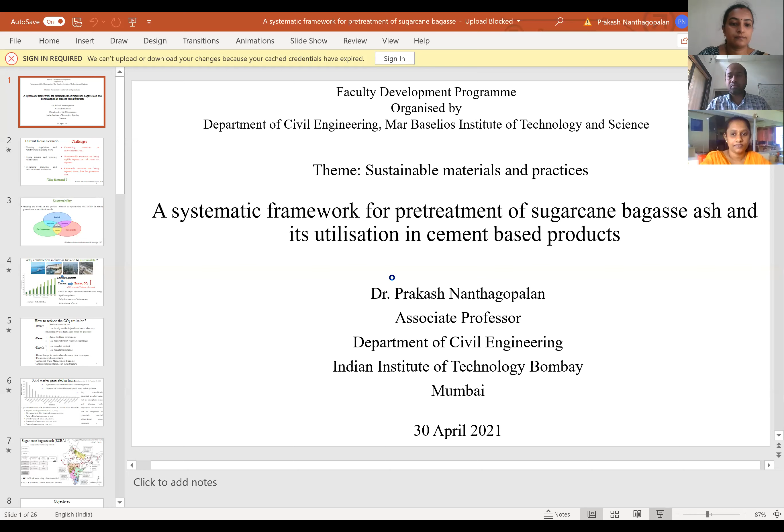Is my voice loud and clear to the participants? Voice is clear, sir. Okay, let me share the screen and check whether the presentation is also clear. Is my screen visible now? Yes, sir, it is visible. Is it in full screen mode? Yes, now it is in full screen mode. Just 1 minute, let me connect and disconnect one more time because I am using two screens, to make sure there is no confusion, because sometimes I used to write on the screen. So don't get panic if I get disconnected in the next 2 minutes. Okay sir, no problem. Just want to make sure that things are clear. If you give me a couple of minutes, I'll be joining.

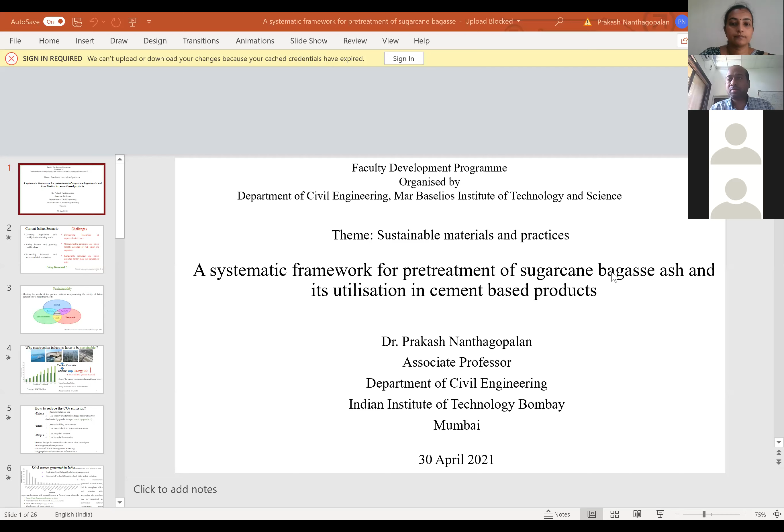Thank you. Thanks for the introduction, and thanks for the opportunity given to deliver a lecture for this faculty development program. I will share the screen and then we can start the presentation. Is it visible? Yes sir, it is visible. Okay, good.

Thanks a lot again, let me start this presentation. This is basically work done by my research team on utilization of bagasse ash, sugarcane bagasse ash, and its valorization or utilization in cement-based products. Since this particular FDP is basically on sustainable materials and practices, I thought I should talk a little on sustainability, and how this particular work is related to sustainability, and how to make sure that sustainability from the material perspective is ensured. So these are the things we will be covering at this point of time.

We'll move on to the presentation. Before going into the discussion of sustainability, let us try to understand what is the current Indian scenario. Whenever we want to do any work, it's possible that sometimes we may do some work, but it may not create a conducive environment. So first let's try to understand the background. As far as India is concerned, we are having a lot of unprecedented growth in population.

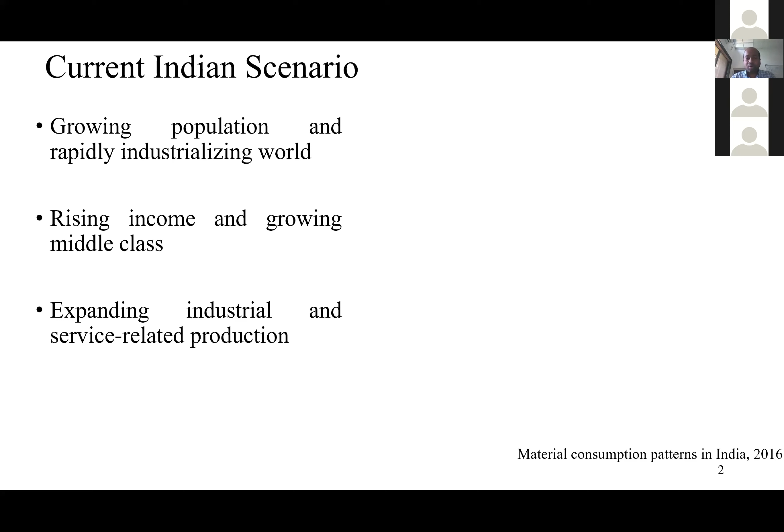So what does this lead to? This leads to expanded industrial influence, because every product that we use is going to have some impact on the earth. As far as the earth is concerned, we know that without these industries, it's very difficult to process. Not only industries, but service-related production as well. So this is the current scenario.

So what are the challenges in front of us? As far as the challenges are concerned, we are consuming resources at an unprecedented rate, and at a very rapid rate.

If you look at the amount of minerals that we extract, just to give an example, as far as the Indian condition is concerned, we are extracting almost 1,600 tons of minerals per square kilometer, whereas the world average is only 450 to 500 tons per square kilometer, which means we are almost 4 times higher than the world average in terms of mineral extraction. Minerals meaning the things being used from the earth for making products. So if that is the case, this is a little alarming situation.

Some of you might know that most people are migrating towards urban areas or cities. Because of this, products that are made have to be transported to facilitate the population. For example, if people are distributed across India, then whatever is produced locally would be available to them. But if you look at the statistics, by 2030, almost 40% of India's population is going to be migrating towards the cities because of job opportunities and other better life aspects.

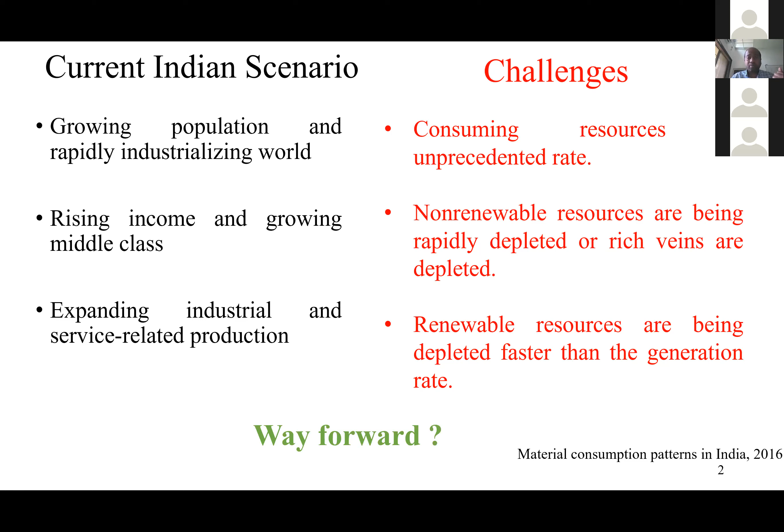Now, the only way forward is to have a sustainable environment. I believe all of you attending this lecture have heard this word for the last 30-40 years, almost 3 to 4 decades, people have been talking about sustainability. There is definitely a very prescribed definition for sustainability, but I'm not going to talk about that. In my opinion, what is sustainable?

Is the earth sustainable? Of course, earth is ideally sustainable. If you look at the living beings on earth, definitely these things are sustainable. How? Take any process, let's say agriculture - right from sowing the seed till it becomes a fruit, vegetable, or useful food product, the residue goes back to the earth and becomes manure, and then it comes back again. So the cycle is very clearly established. Take any process - ideally those things are sustainable.

Then why are we discussing sustainability on earth when every process has a sustainable approach? Please understand that this is because of our lack of understanding and the limitation of science. You might ask, why limitation of science? We are growing every day, we have sent rockets to the Moon, to Mars. How come you are saying limitation of science?

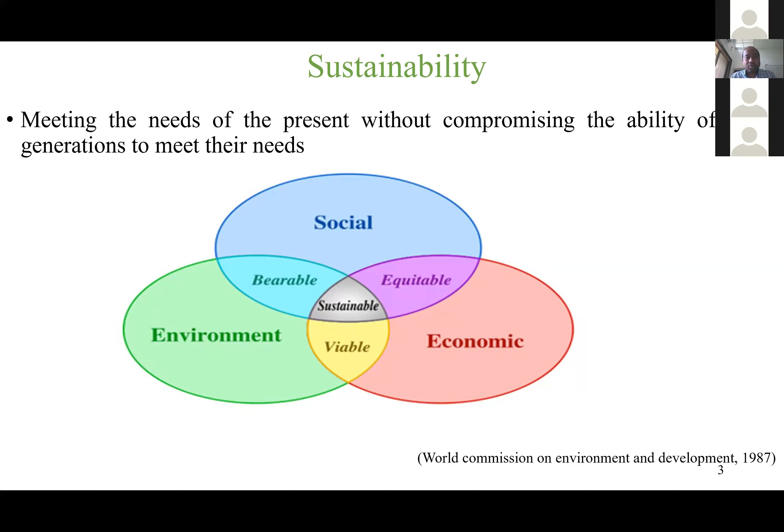Definitely you might have heard about all other sustainability aspects in the last 3-4 days or 3-4 decades. So we do have a sustainable material perspective. First of all, thought process or mind, body, and then we have to move towards the materials that we see. Since this has been discussed over the last 3 days, I'm skipping this particular definition. We will move on to why the construction industries have to be sustainable, because we are relevant to the construction industry.

Why? Because for a country's growth, infrastructure is very, very important. As far as infrastructure is concerned, definitely you need cement concrete. For cement concrete, we need cement. You might know that the cement content in concrete will roughly be in the range of 10 to 15% only. However, the amount of energy consumed and the amount of CO2 liberated is enormously high. Looking at the trend in the left-hand side picture, by 2020 we are closer to 500 million tons of requirement.

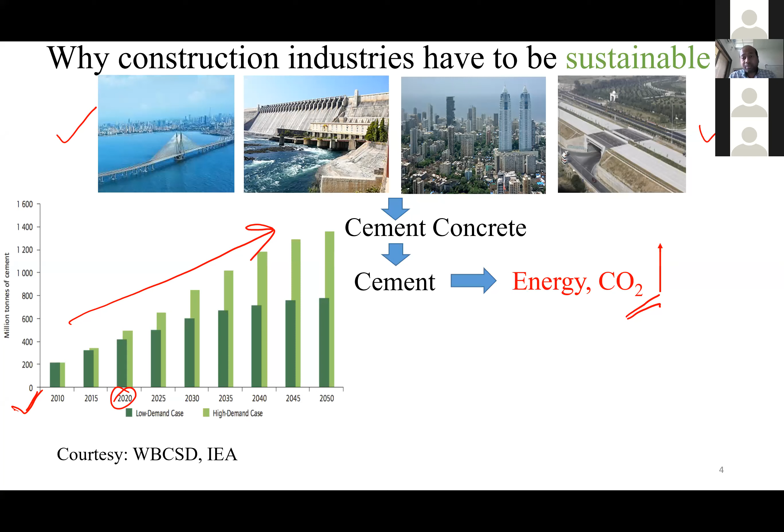If you look at the installed capacity of cement production in India, we are closer to 500 million metric tons at this point of time, which means India has the capability to produce 500 million tons of cement per year. However, the production is a little less because that depends on the infrastructure requirement. So we need to understand that this is going to have an incremental trend because of the requirement from society. We can't say that we will not produce cement because it is creating a lot of CO2. We have to produce cement. We have to have alternative means because this infrastructural development can never be stopped. Then it will affect the growth of the country.

So a lot of emissions are getting generated because of the production of cement. It is polluting the environment. Not only that, whenever we use cement or concrete for infrastructure, because of lack of quality, we are losing the life of the infrastructure. Instead of lasting 100 years, the building is showing a lot of distress in 20 years itself. Hopefully many of you might have seen that.

So what happens? A building which is supposed to stand for 100 years is deteriorating in 20 years. You do some kind of repair, it goes up to 30 years. By the end of 30 years, you have to demolish and construct a new one. So you have to do this 3 times. So look at the amount of material, energy, time, and money getting wasted because of improper workmanship, improper material quality, substandard designs, and so on.

So sustainability cannot be addressed just by materials, by practice; it needs collective effort from all segments of construction, or the stakeholders of the construction.

During the process of making and maintenance, a lot of wastes are getting generated. Generally, in my dictionary, there is no such thing as waste. We can say at this point of time, I do not know how to use that material, because the so-called waste like fly ash, which was considered as waste, now is a potential material. We are giving money to purchase that. So we should not say it is a waste; it's a residue which doesn't have any process at this point of time to consume. We will put it that way.

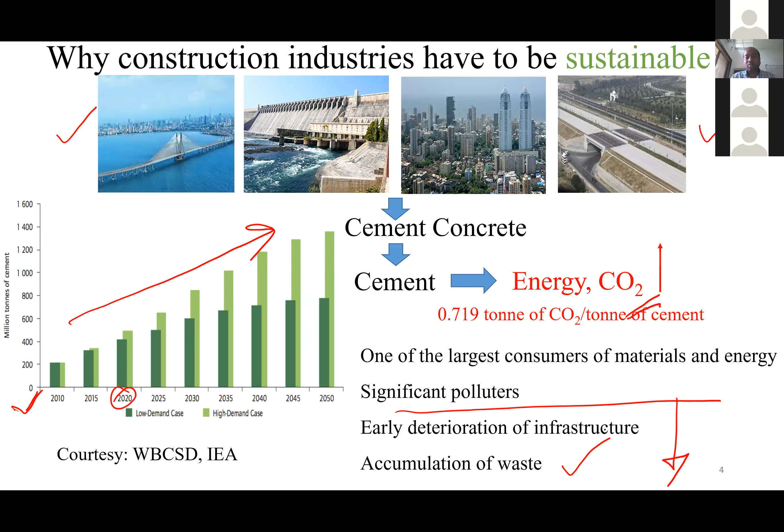So what is the issue with these kinds of production of cement? A lot of CO2 gets generated, and you know what is the problem with CO2: creating problems with the atmosphere, global warming, and so on. These things you know very well. So to reduce global warming, which is affecting the climate, we need to reduce CO2 emission. How to reduce? There are different means. Reduce the material usage; we can consume a little less.

Then using locally available material. What is locally available material? For example, whatever is available in a particular state, we have to try to use it for the construction, which means that the logistics involved in bringing materials from outside can be minimized. Then the second aspect is reuse. We can reuse the building components, and we can also use materials from renewable resources.

Say, for example, bamboo. Bamboo construction is happening in many parts of the country. So if bamboo is there in the local area, let us say Assam, possibly there they can promote more of this renewable resource material usage for construction. Of course, it is not that you should, but you can consider this as a potential aspect for reusing.

Then recycling. Since we started our constructions from 1960 onwards, not 1980, most of the buildings are getting renovated and are reaching a kind of end of life. So these kinds of things generate a lot of demolished waste. So can we reuse that?

Yes, we can reuse that, but please make a note: the building demolition waste which you plan to use in construction, have caution that the building has already been exposed to contaminants. You should consider that and accordingly design the new building, because many times it's not just taking the concrete, crushing it and using it directly. Salts will be there if it is closer to the sea, so salt contamination may be there in the mortar which you are crushing and planning to use in the new construction. So you have to do meticulous research, proper estimation, proper understanding, then only use it.

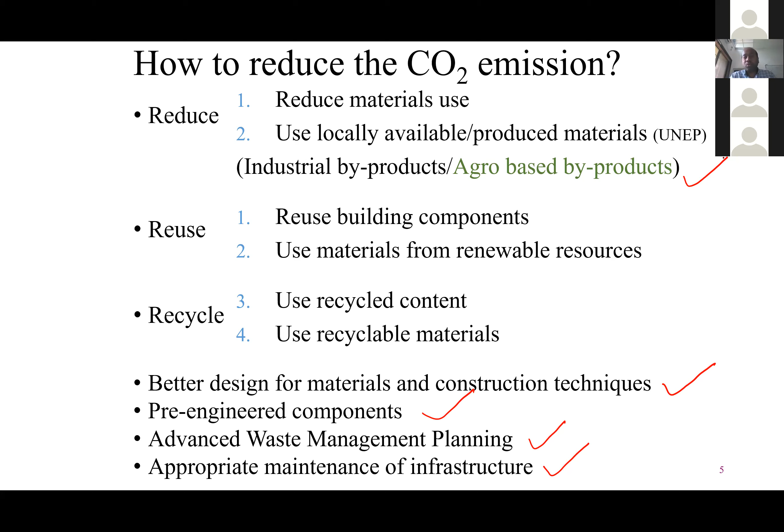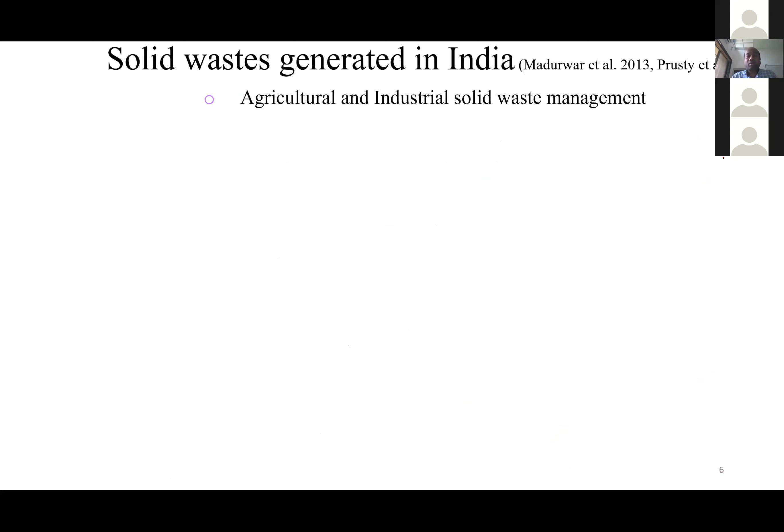So today, looking at the agro-based wastes, let us try to see some numbers in terms of these wastes and why it is a problem. Because agriculture industrial solid waste management is becoming a point of concern. Why? Because these things are polluting the land, water, and air. Why are these polluting? Because of the quantity.

If you look at this agro-based waste, especially bagasse, rice husk, jute fiber, rice straw, groundnut shell, all these things are actually dominating the agricultural residues. Residues means at this point of time, we are not able to utilize its potential, either in the raw form or a processed form.

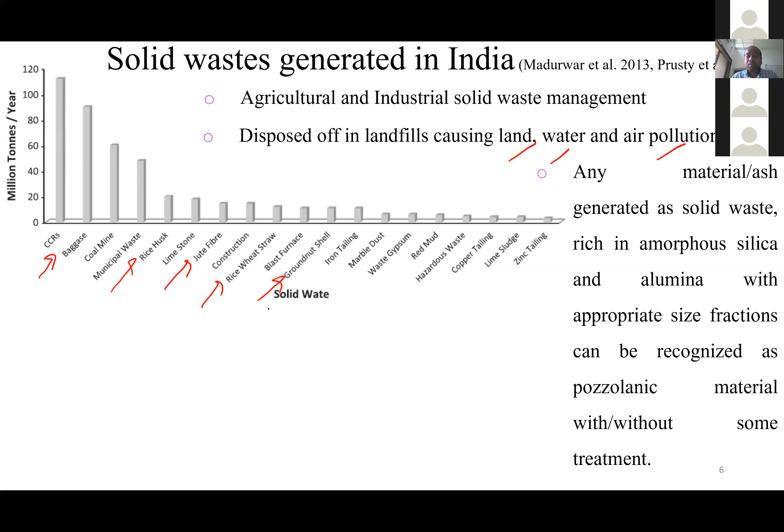So let us look at what other things have a potential to be used in cementitious materials, and what conditions we need to look for in those particular materials. Say, for example, the agro-based residues available in our country or any other country for that matter, if it has a potential to be used in cementitious materials, then it can be used. How do we assess the potential?

In any material and ash, if we are looking at the silica in terms of amorphousness, basically amorphous silica and alumina, and with appropriate size fractions, definitely this becomes a potential pozzolanic material for use in concrete. This is not something new. Everyone knew about it. So whenever you are planning on using any material, please try to look at whether silica and alumina are there, especially for use in a cement-based system, and then check whether it is amorphous or not.

Because many times you may have silica, but it will be in crystalline form. Then it becomes non-reactive and it will be acting as a filler. So it's very important to know in what form these are there. By using XRD, it's possible to find whether it is amorphous or crystalline. In fact, you can quantify it as well.

So once you know this particular aspect, then you can check the list of materials which have similar materials in amorphous form, like sugarcane bagasse ash, rice straw, rice husk ash, palm oil fuel ash, bamboo leaf ash, and so on. These things have been done already. So from this list, we will be discussing sugarcane bagasse ash in this presentation. Why sugarcane bagasse ash?

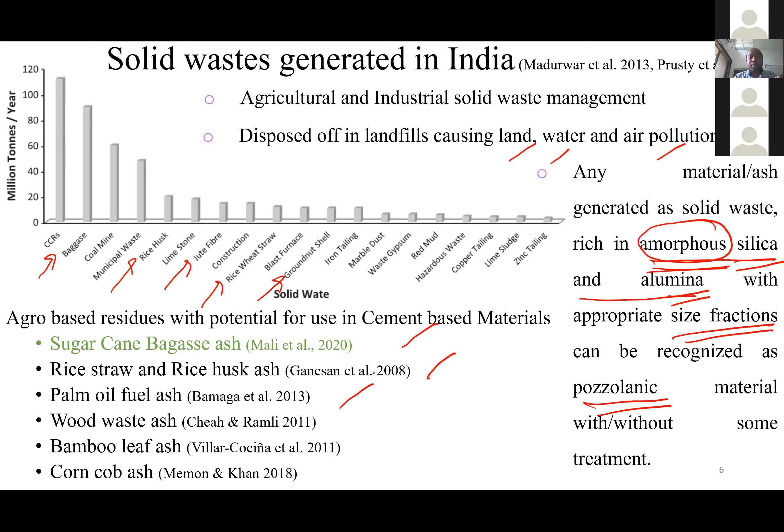Okay, why is this essential? Because even in Kerala, I think the thermal power plants are also few. I believe only 3 thermal power plants are there: Kayamkulam, Brahmapuram, and one more. Only 3 plants, which means the amount of fly ash available will also be less. So we need to look at the locally available materials and then try to make a decision.

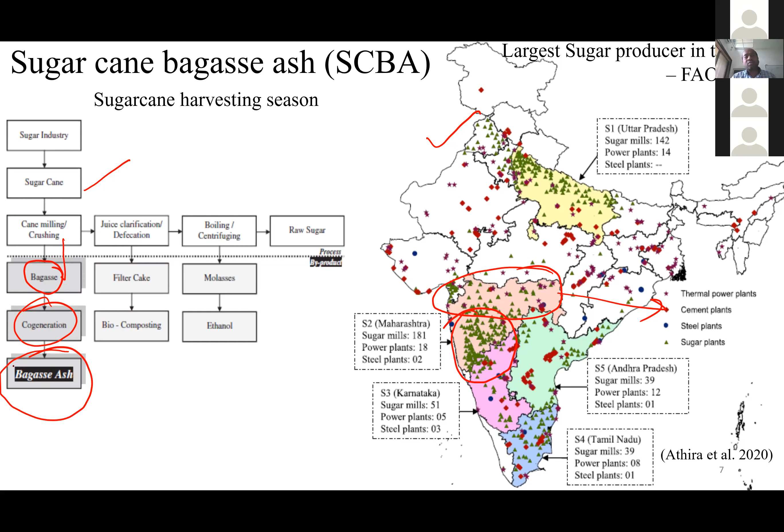After the cogeneration plant, the bagasse which gets converted into ash is called bagasse ash. This is what is referred to as sugarcane bagasse ash. As far as this material is concerned, we are producing more than 44,000 metric tons per day of bagasse ash. But this is old data, published in 2015. So possibly by this time we might have reached almost 50,000 or more metric tons per day.

Looking at the amount of bagasse produced in the country, it is always desirable to see whether this has the potential to be used in some form in society. That's why the first availability study is done. It clearly shows that almost 50,000 tons of material all over India is being produced, which means this has the potential to be used.

But does this have the potential to react with cementitious materials? That we have to check. So we did some analysis, and based on the analysis, it was found that this has carbon, silica, and alumina. And the silica and alumina are also amorphous in nature.

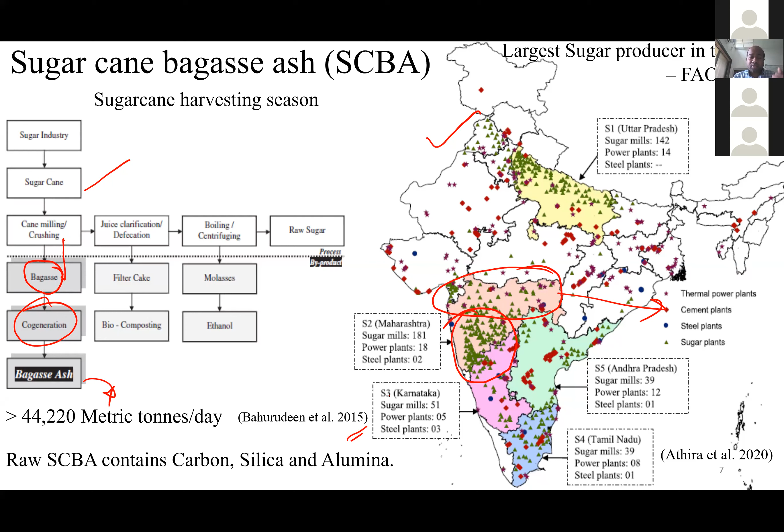So please recall the discussion that we had early in the presentation that any material which you plan to use for cement-based replacement definitely should have amorphous silica and alumina. Since this has silica and alumina and it is amorphous in nature, this is basically a potential material for using in cement-based systems.

Okay, so based on that, the objective is framed mainly to transform SCBA into a suitable pozzolanic material for using in cement-based systems. Second, to optimize the SCBA dosage through a conceptual approach for using in cement-based products. So first thing is the as-received bagasse ash, whether it has a kind of potential to be reactive; although the composition says so, we have to evaluate it through certain test methods. Second, once we find that this is pozzolanic in nature, how much percentage we have to replace and how to optimize the percentages.

Can this be done through a conceptual approach? Yes, it is possible. Why do we need to go for a conceptual approach? Because these things help us to maximize the potential of the material used and maximize the sustainability aspect of this particular material as well.

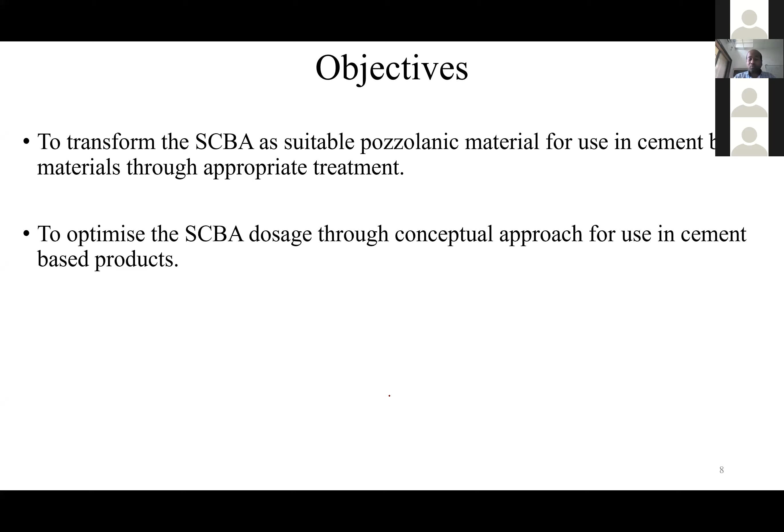So we have collected this sugarcane bagasse ash, SCBA, from a sugar mill in Maharashtra, and the temperature that this particular bagasse has encountered is almost 750 degrees Celsius. Generally, for these ashes to be more amorphous, it should be in the range of 600 to 700. Since this is a high temperature furnace, it has gone up to 750 degrees Celsius.

Okay, and then we have done chemical composition analysis, and if you find, this silica content is enormously higher, that is more important. At the same time, there is an ASTM classification, ASTM C618, which clearly defines that any material which you wish to use as a pozzolanic material should have more than 70% in terms of silica, alumina, and iron oxides. Since this is 92.59% and it is amorphous in nature, we can definitely and confidently use this material for replacement of cement. And of course, the collection system is also very important, where you are collecting.

When you look at the microscopic images of these particular sugarcane bagasse ashes, different forms are available. Fibrous materials are there, porous materials are there, tubular materials are there. Then some spherical materials are also there with a lot of porosity. And these particles are hygroscopic. What is hygroscopic? Hygroscopic means a material which has a tendency to attract moisture and at the same time hold the moisture. So this particular bagasse ash has that potential to attract moisture and hold it, which means the porosity in this system is higher. Okay, right. So this is how we have to characterize.

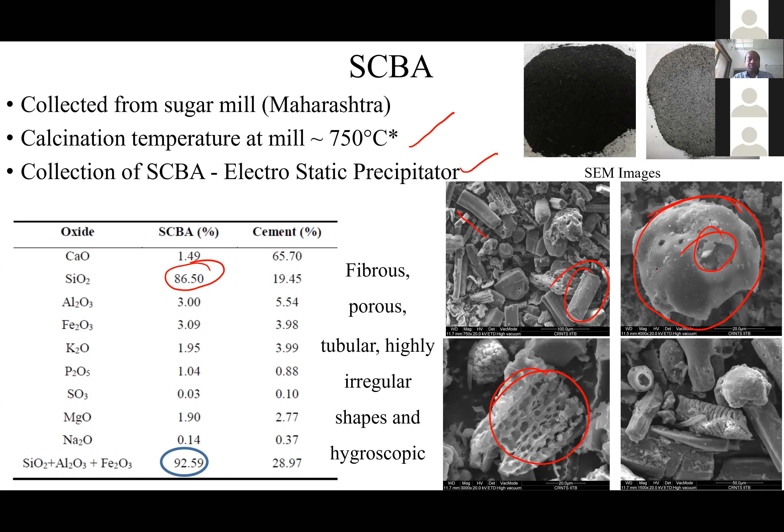When you look at the particle size distribution, the sugarcane bagasse ash that was obtained is almost 25 micron in average size, and cement is almost 20 micron; D50 is 20 microns. So looking at this, these particular materials are relatively coarser than cement, which is not desirable in terms of packing effect. So we have to grind it so that the particles become finer. Once it becomes finer, it contributes both physically and chemically. At this point of time, it can contribute chemically because of the presence of silica and alumina. But now, if the sizes are reduced, it can fill into the pores of cement, and that gives a kind of physical effect as well.

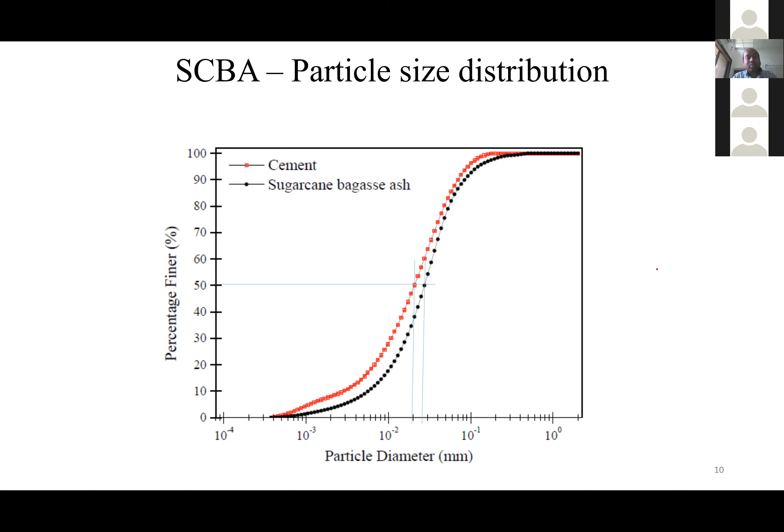So we have to look at the other aspect also, LOI. Many of you might know about this LOI, loss on ignition. This is nothing but loss of mass, quantified or expressed in terms of loss on ignition. As far as ASTM is concerned, any material that seems potential for use as a pozzolanic material needs to have less than 10% LOI, which is basically contributed by carbon particles. The ash received from the industry is around 13% LOI. So as per the definition, it doesn't really pass the pozzolanic criteria.

So what we have done is we have tried to incinerate the materials at different temperatures, 800, 900, 1000, 1100, to see whether we could reduce the carbon fractions. Based on the study, it is very evident that the carbon percentage, LOI, decreases with increase in temperature. But the problem is, once we start to increase the temperature, crystallinity kicks in. Tridymite and cristobalite, these are also SiO2. These are crystalline materials, which means they will not possess reactive potential.

As I mentioned earlier, we need amorphous silica to dissolve into the solution and react with calcium hydroxide to form products. But in this case, since these are crystalline silica, they will not have reactive potential in cement-based systems. So we concluded that although the LOI decreases, it is very difficult to get the reactivity. We are losing the reactivity.

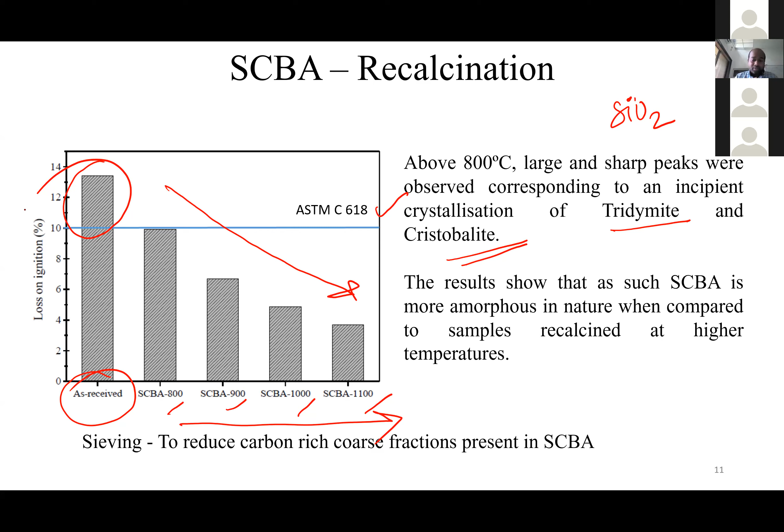We'll move on to the next slide. First we tried to see if some treatment is essential to reduce the LOI. By simple sieving, we could bring down the LOI. That's fine.

We have reduced the LOI, but whether the particle size, which is basically higher than the mean size of cement, is going to be a hindrance, that has to be addressed. How do we address it? By reducing the particle size. How do we reduce the size of the particle? By using comminution or particle size reduction. So we used a ball mill.

This ball mill has a capacity of 100 liters. We used it at a speed of 20 RPM, and we used different steel ball sizes.

Now I wish to give you a couple of pieces of information. Those who use ball mills are many times very casual about selecting the charge-to-materials ratio and the volume of the charge and materials relative to the volume of the container. We always have to be very meticulous in selecting the charge-to-materials ratio. What is charge? Please understand, charge means the steel balls are referred to as charges, and materials are referred to as SCBA. Generally this should be in the ratio of 4:1 or 5:1.

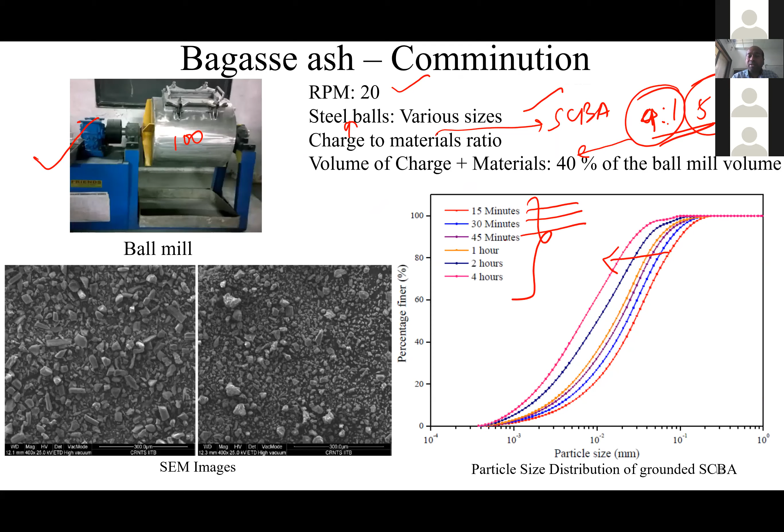To understand the optimum grinding time, we measured the specific surface area for each time interval—15 minutes, 30 minutes, 45 minutes. We take the sample and do the surface area test. When we plot these, it's evident that up to 120 minutes there is a clear increment in the surface area. Beyond that, it becomes almost saturated. So based on this information, we can understand that for this particular bagasse and this particular ball mill, the optimum grinding time is 120 minutes, because beyond this there isn't much enhancement in the surface area.

Why are we looking at this from the energy perspective? Because if we grind beyond 120 minutes, the benefit we get from grinding is less than the energy we consume. Since we are already talking about sustainability, unnecessarily spending energy makes this process unsustainable. That is why we do this optimization in a systematic, simple, step-by-step procedure.

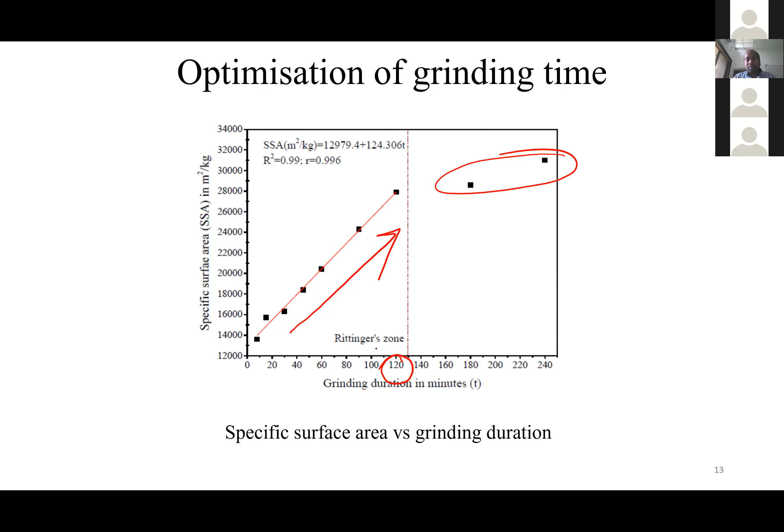So first we received the material and did the analysis for chemical composition, checking whether it is amorphous silica or not, then moved to thermal treatment. In the thermal treatment, it was evident that it doesn't give amorphousness, rather it gives a crystalline structure, so we are not giving thermal treatment. Next we move on to grinding, where we optimized how much the grinding time should be. Now the material is ready, so the first objective is complete.

The second objective is to optimize the dosage—how do we optimize the proportions for the processed SCBA?

This aspect of optimization can be done using the principle of particle packing. Many of you might know this. Particle packing is one of the vital aspects of concrete mixture proportioning. This word isn't used in the Indian standards or any standard, but the implicit scientific concept behind every mixture proportioning standard is particle packing. How we select materials and their proportions, especially aggregates, has an underlying concept of particle packing. In the standards we use the word 'gradation,' but its implicit scientific meaning is dictated by particle packing.

What is particle packing? It's a concept by which we select the right sizes and proportions of materials for maximum packing density or least void content. The packing density is expressed as a unit. Please understand, particle packing is a concept, and packing density is the unit by which particle packing is expressed.

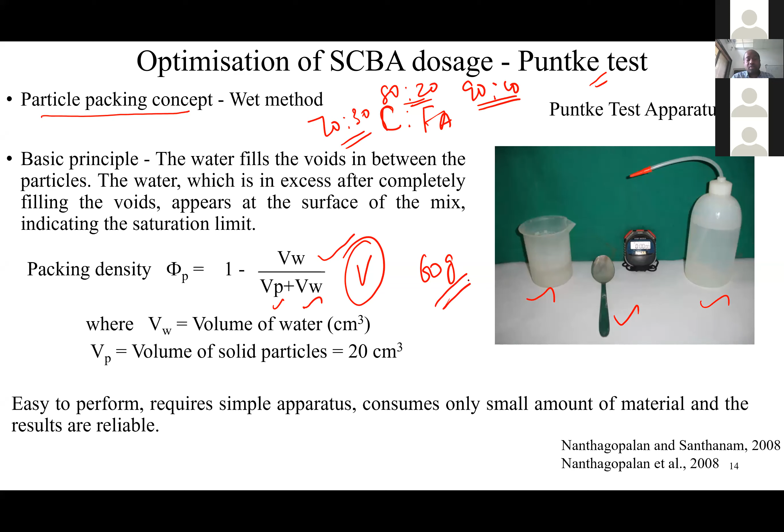Now why is it increasing initially and then decreasing? Initially, since these particles are ground fine, they fill the space between the cement particles, and maximum packing density is achieved for this system. Beyond 15%, although the particles are finer, their dominance tries to create some disturbance to the packed system. So each cement particle will have a kind of arrangement, let us say.

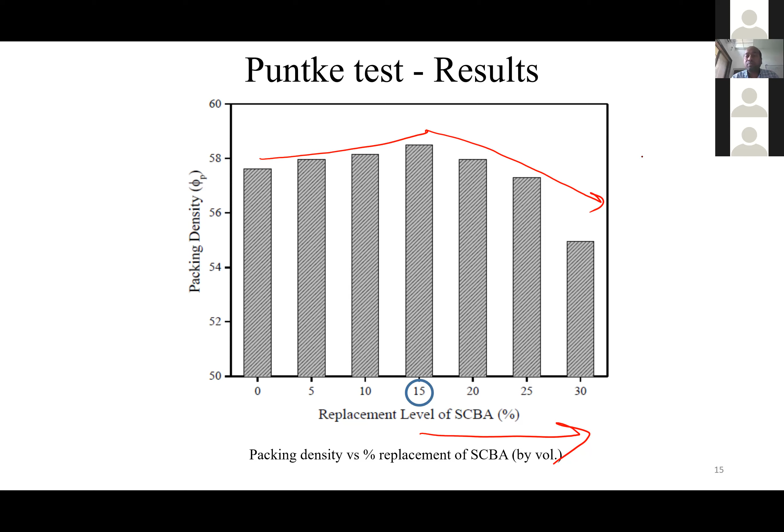There is a container like this, and the particles are here, and these sugarcane bagasse ash particles are filling in here. Now if the percentage of SCBA is increasing, this cement particle may be disturbed by another particle coming in between, like this. So what happens is the void content is invariably increasing, and that gets reflected as a loosening effect. We call that the loosening effect, and because of it, we get a decrement in the packing density.

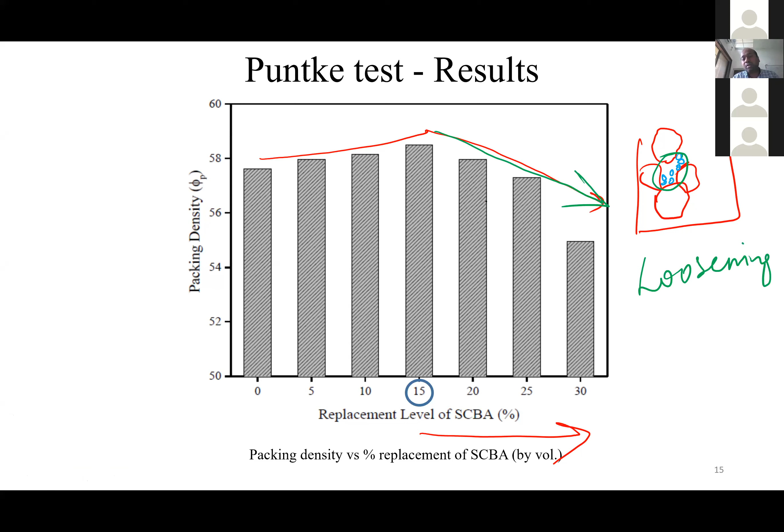Next, since I mentioned we are optimizing the dosage based on a conceptual approach, earlier we discussed particle packing as a concept. In this case, we will be discussing rheology. What is rheology? It's simply the science which helps us understand flow.

The word may look familiar to many of you, or maybe new to some. Rheology is something known to us already; the only difference is we are not aware we are understanding rheology knowingly. For example, every morning we take toothpaste, and when we squeeze the paste out, we are invariably using the principle of rheology, but not knowingly. So when you press, it comes out. When you lift your thumb, the paste stops.

So what is the meaning of that? That particular paste needs some kind of stress, and when the stress is applied, it reaches a point called yield stress, beyond which it tries to move out. Once you release the stress by lifting the thumb, the stress applied is stopped, so the paste, which is supposed to deform, stops there. Every material is designed in a very different way.

For example, coconut oil is different—for that, you just tilt it, and it will come out. Cream, tomato sauce, everything invariably has a rheology.

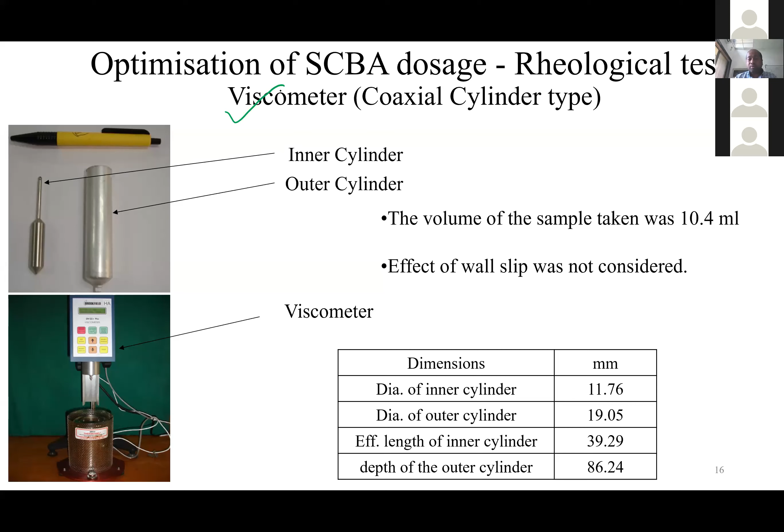In the viscometer, what we actually do is give a shear profile, which means we are allowing the material to shear in the fashion we wish. For example, in this case, we are giving a pre-shearing. Pre-shearing means you are making the material shear.

Is my camera on? Can somebody please respond? Yes, sir, it's on.

So, for example, let us say this is the container. We are trying to make sure that this system is mixed properly. This is called the shearing process. Initially, whenever we do some kind of testing, we do some pre-shearing. I'm not sure how many of you have heard this word pre-shearing. It's basically like erasing the memory. Why do we need to erase the memory?

For example, almost 50 people are attending this lecture. If you had some issues before this lecture and carry on with the same thought process, you will not be able to grasp the complete potential of this lecture. You might have taken a deep breath and said, okay, clear, let me listen to the presentation. You are erasing your thoughts. That is called pre-shearing.

We do the same thing in material also, because when we mix in the mixer machine, we are taking, pouring, involving the material in different processes. Those processes should not influence the property of the material. For that, we erase the memory of the material. You might wonder whether non-living things have memory. Of course, yes. Everything has memory.

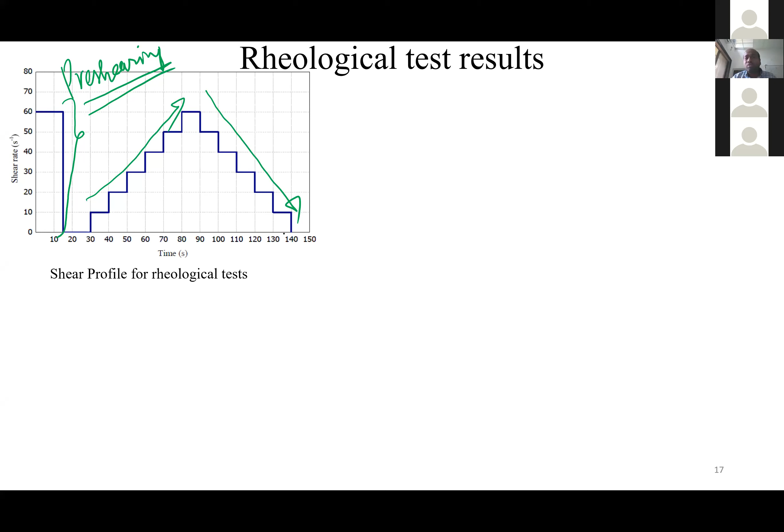Second, you move the hand the same way as in water, in curd or say honey, you will feel a different resistance, right? Why? Because for the same speed, you are getting a different experience from different materials, because the response is different from each material because of the integrity of the material. These kinds of systems can be understood for cement-based systems also, because these things are very important for making the material mix, place, vibrate, pump. For all these processes, this becomes a base.

So to understand it in a very simple and more stable manner, instead of taking the ramp up data, where the machine will also struggle to get the response, in the ramp down data you will get stable data. That is why it is always preferable to get the ramp down. This is called ramp up, ramp down. The ramp down data is taken and plotted between shear stress and shear rate. The minimum stress required to deform is referred as yield stress.

For example, in the morning, when you press the toothpaste, initially it will not come, but you have to squeeze it more. Beyond a certain squeeze, it comes out, which means that is the amount of stress required to deform the material. That is called yield stress.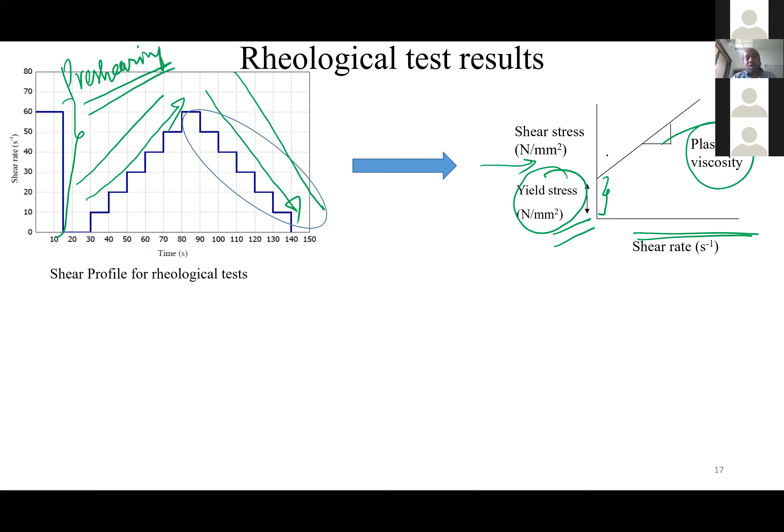Now, what is plastic viscosity? Once it is moving out, the slope of that is referred as plastic viscosity. If you plot the data, based on the slope you can get plastic viscosity. What is the physical meaning of plastic viscosity? It is the flow resistance after it has yielded. After the particular material has yielded, how much resistance the material is offering for flow. That is what is defined as viscosity.

So using this particular graph, with replacement level, if you make a plot of yield stress and plastic viscosity, it's very obvious that beyond 15% replacement, the stresses are increasing tremendously. Why? Because as I mentioned earlier, whenever packing density increases, void content decreases. So for a given amount of water or paste, that will facilitate better workability or deformability. If there is a loosening effect, then it creates a lot of resistance, and because of the resistance, this will have a lot of issues.

What kind of issues will it have? These issues will be in terms of resistance to flow and other things. So it is very evident that the 15% which gave maximum packing density is reflected here. Up to that, there is not much difference in values of both viscosity and yield stress. But beyond that, the values are increasing tremendously, which clearly states that 15% is optimum for this particular combination.

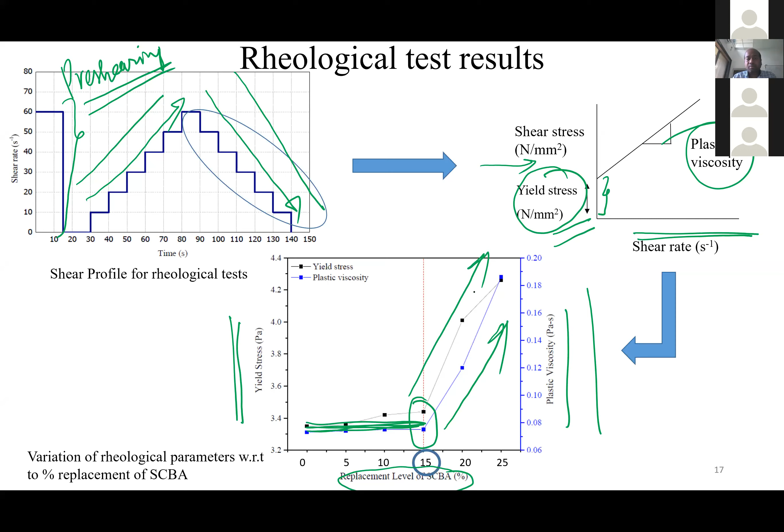So we have optimized the OPC and SCBA dosage. Now, how to optimize the SP dosage? Simple test methods are available. We use the mini-slump test. Almost every one of you knows it. You make the paste, pour it into the container, lift it, measure the diameter in 2 different directions, take the average, and then report it for different percentages.

There is one more test, the Marsh cone test, also available. I prefer to use mini-slump because of its ease and its relevance to concrete, because there also you use the slump cone, which is related to workability, and the fundamental parameter related to the mini-slump test is yield stress.

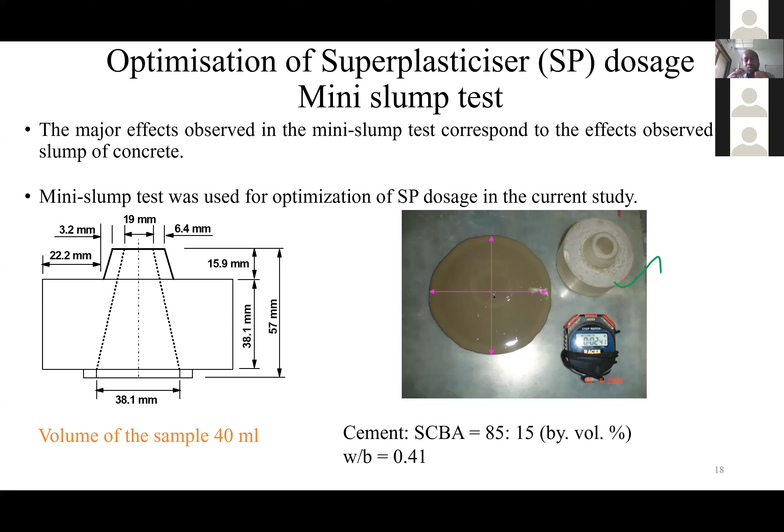For superplasticizer, generally this influences the yield stress of the system predominantly, compared with viscosity. So you have to select a test which is suitable to understand the parameter precisely. Since superplasticizer influences yield stress and the mini-slump cone is dictated by yield stress, we have to use the mini-slump cone test for SP dosage. This is also being used.

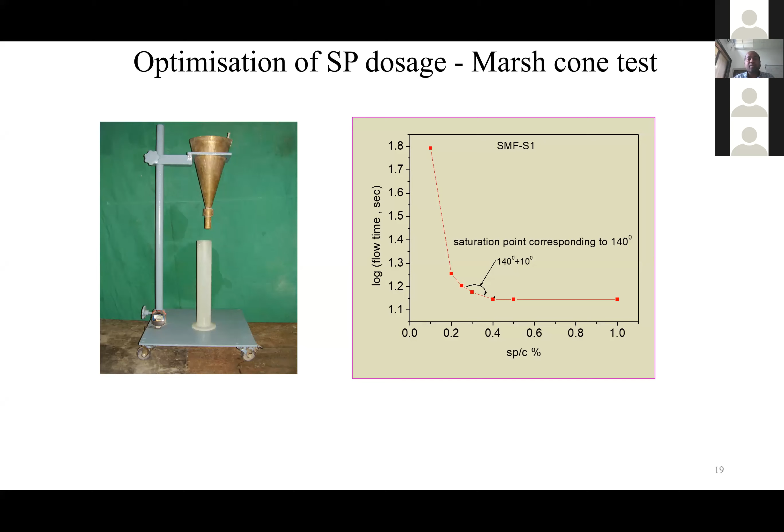However, the Marsh cone is more predominantly a viscosity-dominated apparatus. Of course, this can also be used based on the conditions, but these conditions are also a little bit tricky. So I prefer to use mini-slump over Marsh cone.

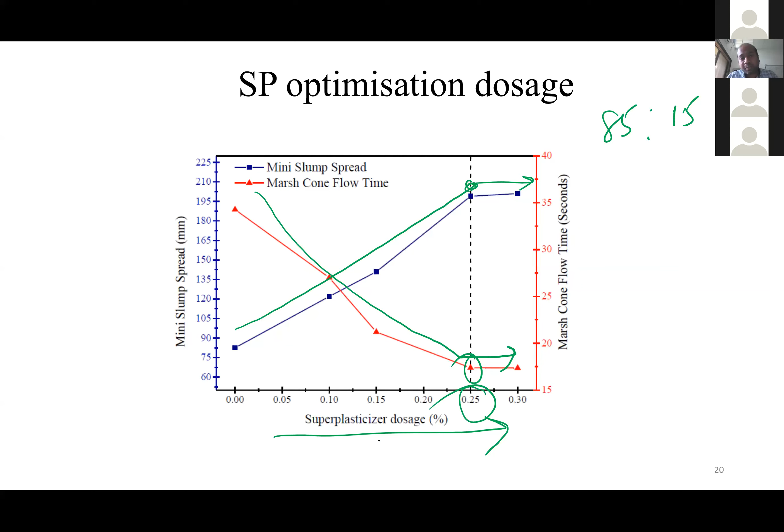So to do the test with increase in SP dosage for this 85% OPC and 15% SCBA, the PCE-based SP dosage is increased, and you could clearly see that the mini-slump flow increased, and beyond this one, there is not much of an increment. The same thing with Marsh cone, the time decreased, and beyond this one, not much change. So this 0.25% SP dosage is the optimized dosage for this particular system.

Okay, now we have optimized the SCBA dosage. We have optimized the SP dosage for the optimized proportions of OPC and SCBA. Now, we are always talking about this conceptual packing and all those things. Does it really have some impact on the compressive strength? Otherwise, there is no point, right?

So all the proportions were fixed, and the cement combination and standard sand are being used. Why standard sand? Many times, if you are not standardizing the sand or using standard sand, there is a problem that the gradation of sand will influence the strength. So my suggestion to all of you is, whenever you are going to do any experiments related to concrete or mortar, please make sure that the gradation is constant. How do you ensure gradation to be constant? You have to standardize the sand or standardize the aggregate.

When you go and take the sand from the pit which is stored outside your lab, every time the gradation changes, because you take from the bottom, then the particles slide down, so the gradation changes.

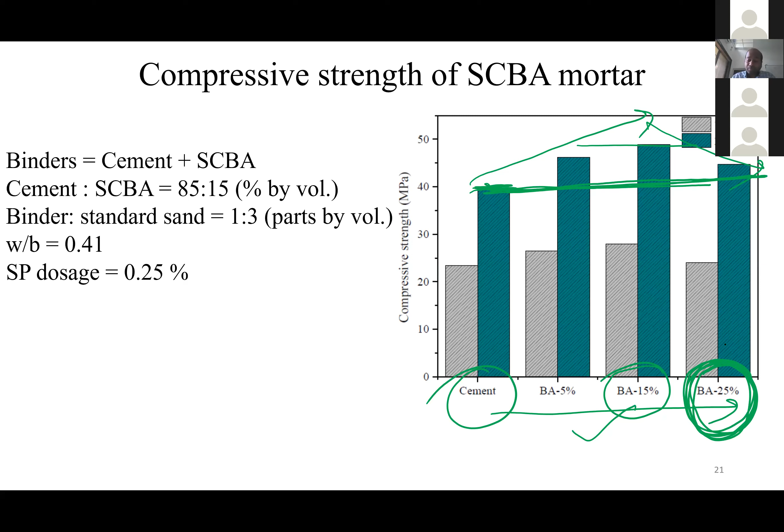Right. We are almost ending the presentation. Maybe in a couple of slides I will be closing. So far we have discussed SCBA and its potential for use in concrete. Based on the investigation discussed so far, we have proposed a simple method.

Collect the SCBA from the sugar factories, note down date, time, type of ash, what kind of boiler, temperature and everything. So once you know these basic information, then try to see whether this material has a potential to react or not. Does it really need any kind of treatment, thermal treatment, mechanical like grinding treatment and so on. All those things have to be assessed.

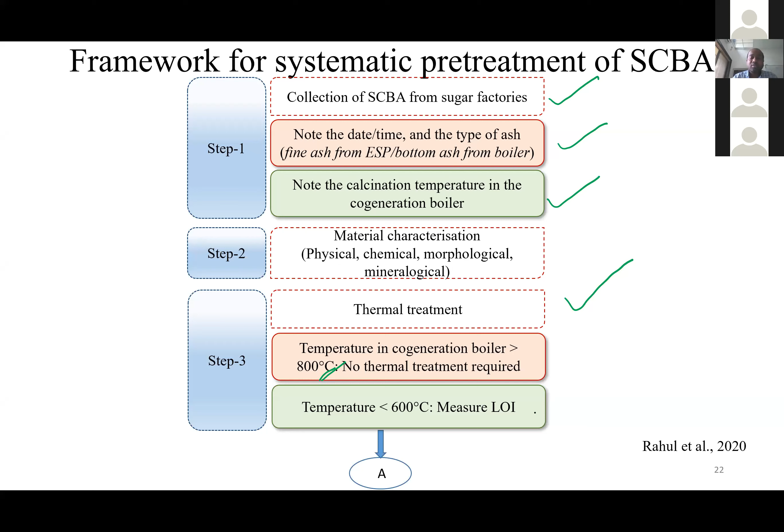So first, thermal treatment. If the boiler has already exceeded 800 degrees Celsius, please do not invest money, effort in again incinerating that particular material. If the incineration temperature is less than 600 degrees Celsius, then you can go for measurement of LOI. If the LOI is less than 10%, definitely you can go for it. Otherwise, if it is greater than 10, go for a little bit of heat treatment to make sure that it is less than 10%.

Otherwise, we can also go for sieving the coarser fractions, right? By sieving the coarser fractions, carbon particles can be removed. Once it becomes less than 10% LOI, check the reactivity, basically the silica, the amorphousness through XRD and the chemical composition through XRF. Once it is done, then optimize the grinding time using ball mills.

Then 3 things we have to do. One is SCBA dosage optimization through particle packing. Then optimization of SP dosage for the optimized SCBA blends. And then we have to validate that in the binder combination using mortar. So with this particular framework, one can achieve the sustainable use of industrial agro-based residues into a potential product.

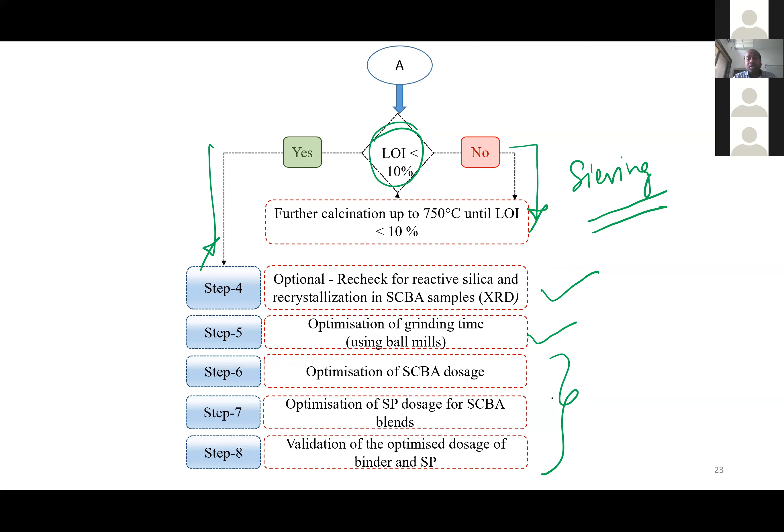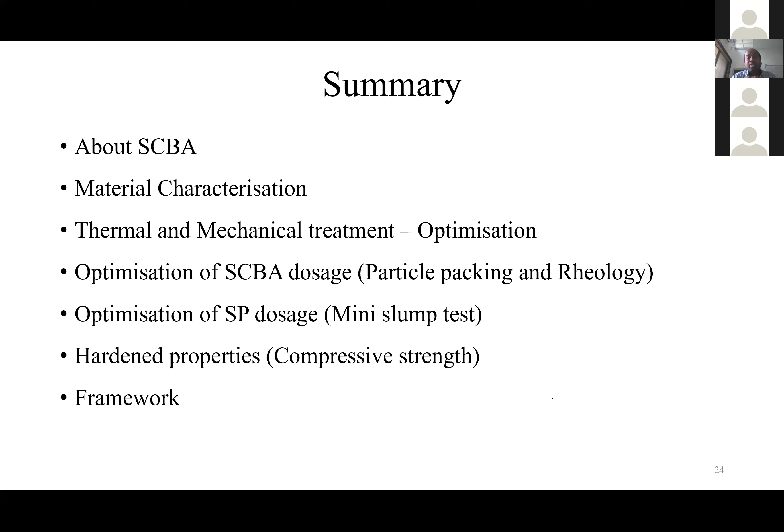So, the summary of what we have discussed. We have discussed sugarcane bagasse ash, its material characterization, thermal and mechanical treatments, how to optimize and rationalize them, and the important points under thermal and mechanical treatment. Then we discussed 2 concepts, particle packing and rheology, following which how to optimize SP dosage and validate through compressive strength. Based on these things, we have proposed a framework, and there is clear evidence that we can maximize the potential of SCBA usage in cement concrete.

So along with my associated research team, we have published almost 8 to 9 papers on use of agro-based wastes in cement-based systems. The current presentation that I have made is basically based on this particular paper.

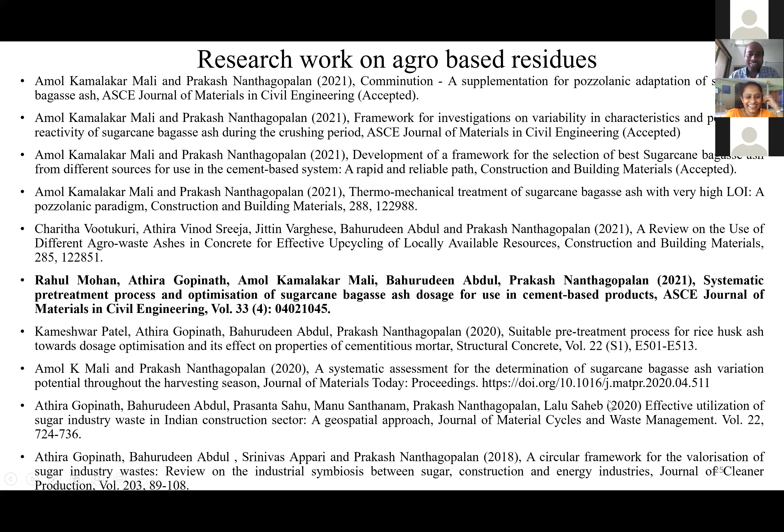Why do we test at 28 days? If somebody can answer, I will be very happy. Sir, if it is cast on a Friday, then 30 days will fall on a Sunday. So it's best to remember the dates: 4 weeks later, we can check on 28 days. Okay, good. I will explain that in an elaborate manner so people can understand better. Yeah, this is in colloquial language, I just said that.

It's correct. So generally, at the age of 1 day, normal concrete will get 30% of strength. In 3 days, 50% of strength. In 7 days, approximately 66 to 70%. In 28 days, you get 90%. This is what the general thing says. Don't get confused; how come 90% at 28 days becomes acceptable? It is 90% of target mean strength, that one should know.

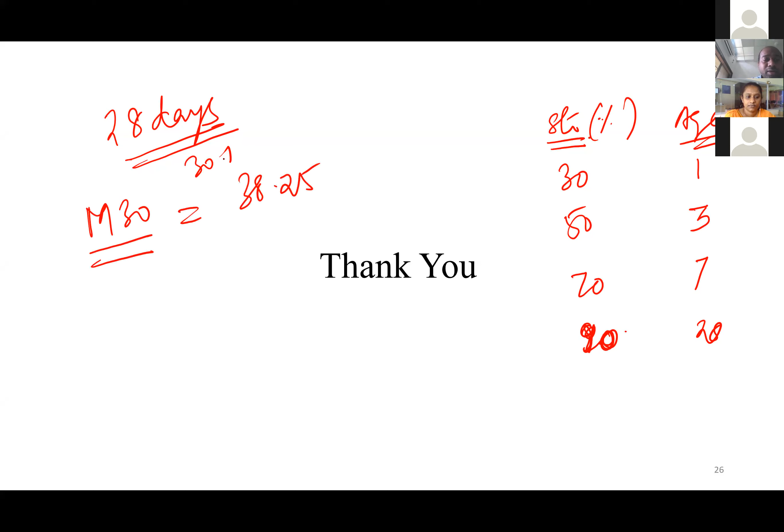So if you design for M30, you target 38.25, correct? Yes, sir, 30 plus 1.65 times standard deviation. This 90% is of 38.25, which is more than 30 MPa. So if you look at the difference in age, it is 21 days, and the percentage increment is 20%. So beyond 7 days, almost 1% is gained every day.

So it really doesn't matter if you test it on 27 days or 29 days or 30. For example, if you test it on the 27th day, it will be 89%; on the 29th day, 90.5 or 91%. So it doesn't matter actually. But the problem is, if you cast the concrete on Monday and test at 27 days, it will be Sunday. Second, if you cast on Friday and choose the age 29, it will be a Saturday.

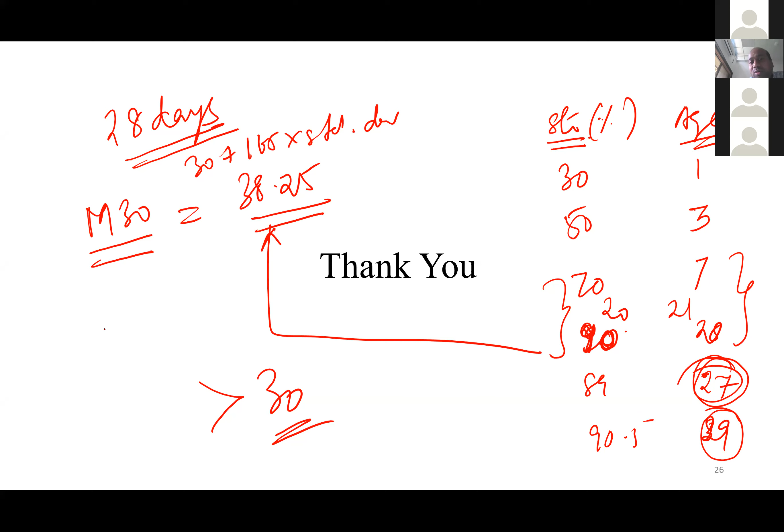This was not with us early because when we were ruled by British people, they were not working on holidays. So that's why these things are there.

But I'm totally against these kinds of numbers. Nowadays, this 28 should not be there. We should be targeting performance-based specifications. We can't just say it is 30, 28, and other things. We should be going beyond that.

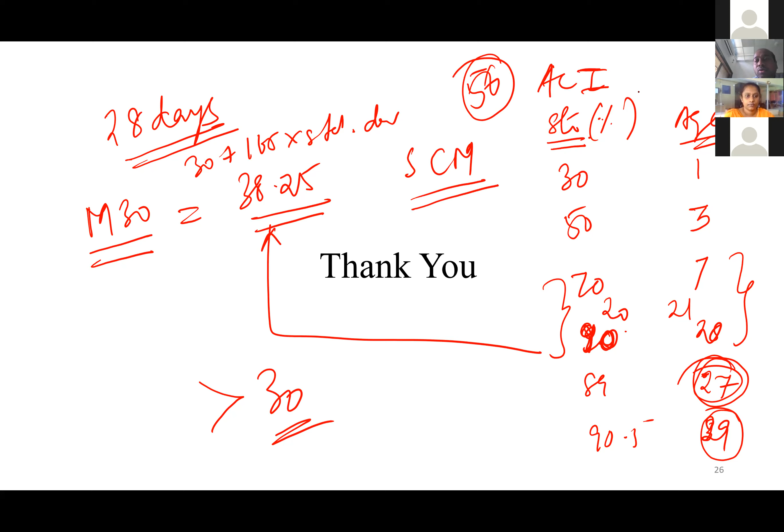Whenever we use any kind of SCM, supplementary cementitious materials, we should test it at 56 days. This is there in ACI code 212 and 232. It has been clearly mentioned, but as far as IS standard is concerned, still the enforcement is not there. But it is always desirable to test it at 56 days whenever we use any kind of supplementary cementitious materials like fly ash, slag, bagasse ash, rice husk ash, and so on.

Okay, right, yes sir, thank you for the good information and explanation, sir. Thank you, sir. If you explain this way, then the students can understand better.

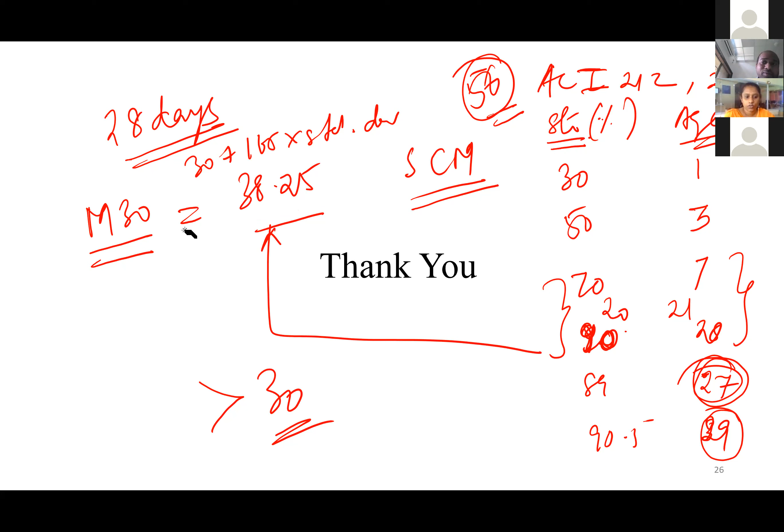Do we have time for one more question? Because it's 11:20. There are no more questions. Okay, questions are there, please ask. I will.

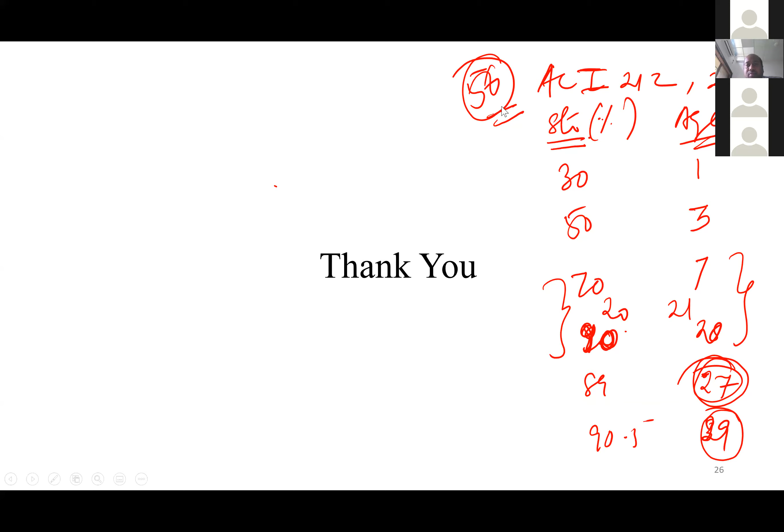Do I have to read it or where is it? In the chat box, it is there. I'm not able to. No more questions, sir, in the chat box. Okay, fine, anyway, okay, fine, good.